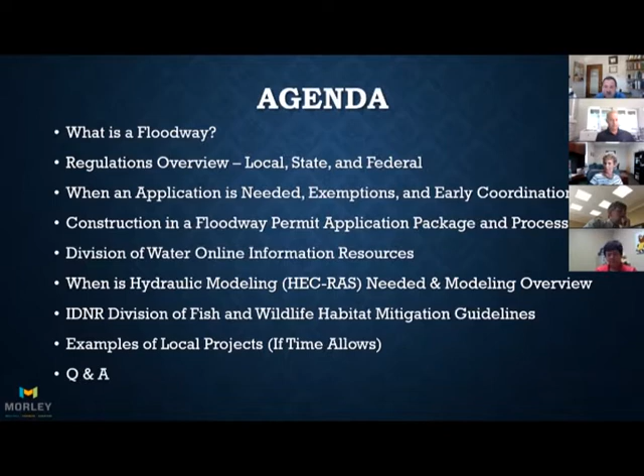This whole issue of floodplains and floodways really stems out of the National Flood Insurance Program. It is a partnership between local, federal, and state levels of government. In the past, our country has seen several significant floods. In our part of the world, we've seen major floods in 1913 on the Ohio and Wabash, 1927 on the Mississippi. Flood of record here in Evansville was 1937 on the Ohio. There was a substantial event in 1961 on Pigeon Creek. There have been several others, and there's been various levels of governmental response to those over the years.

Over time, that eventually led to the National Flood Insurance Act in 1968 and an amendment in 1973. The initial act created the flood insurance program. It made it available and started to create floodplain maps, so people knew if they were in a floodplain, which assisted in the insurance process of trying to figure out your premium, for example. That initial effort, though, was optional - no one made you buy flood insurance, it was up to you. The amendment in '73 added the mandatory purchase requirement, which many people may be familiar with. It essentially tied flood insurance to being mandatory if you had a loan or mortgage, for example, from a federally backed institution. Essentially, the banks needed to have their collateral insured if they were in the floodplain.

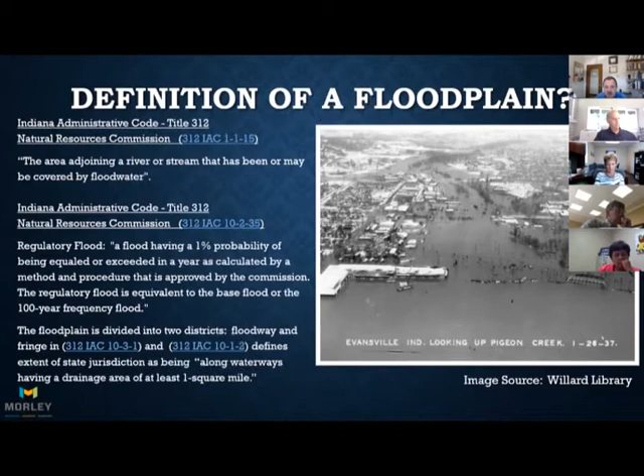Indiana code defines the floodway as, at minimum, the channel, and then the parts of the adjacent floodplain that need to carry water efficiently and move it downstream.

The county ordinance here, and other counties have very similar, if not identical, ordinances, as do cities and towns, with a little bit longer definition. It says it's the channel or stream, creek, ditch, etc.—and the keyword there again being—and portions of the floodplain that are adjacent, to move that peak flow downstream.

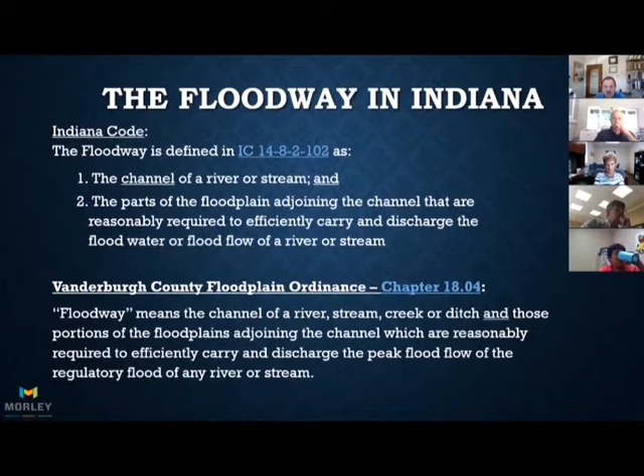So what does that look like? This is a schematic that shows up in essentially every flood insurance study that FEMA publishes. It defines the regulatory floodway. FEMA's online glossary definition of floodway again talks about channel and adjacent lands.

It includes, though, another consideration for cumulative effect, and that's what this exhibit starts to get at. What you're seeing—I'm going to turn on this, can you see the red highlighter? Okay, good. So in this example, the dark heavy line is the existing ground elevation, with the channel here in the middle.

So an assessment was done, and the floodplain was determined to be points A to B, the dashed line horizontally across that cross section. To look at the concept of a floodway, you begin to fill, or the term is encroach, into the overbanks, both left and right, to a point that it causes that same flow rate to increase in elevation by some prescribed surcharge.

When you look at that, you try to do an assessment so that you're taking equally in terms of the capacity—the term used is conveyance—away from both sides as evenly as possible. Sometimes it's disproportionate to begin with, but that's the goal.

That surcharge is defined by some governing authority. In the core NFIP regulations that FEMA prescribes, that surcharge is actually a foot. In Indiana, the State Flood Control Act has modified that so our floodways are based on 1/10 of a foot surcharge. Sometimes you'll see it referred to as 14 hundredths, or less than 15 hundredths.

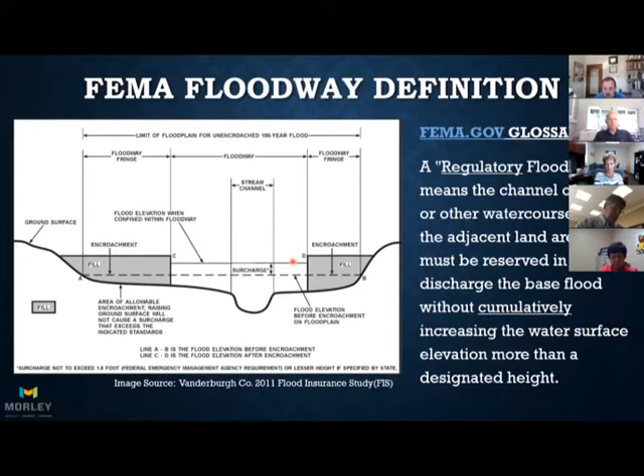This next screen looks at that in maybe a prettier view. In this example, you should think of the factory on the far left and the homes on the right as existing, and then a proposed project may be kicked around that would create an additional factory or an expansion on fill.

As you can see here, originally the floodplain was at this elevation, but by starting to fill in the floodplain, it can increase the elevations, and left unchecked, that can affect people and existing structures that were there before.

This may be drawn as just one single cross section, but think of this in the context of going upstream. Maybe this house is a half a mile upstream, this one a quarter mile upstream. So it's not only about what you do at your site if you're proposing a project or delineating a floodway, you need to see how that assessment affects things upstream, and look at it cumulatively over time as you go forward.

We'll touch back on that after a bit on the application side, looking at how things may change over time if you're doing a detailed assessment.

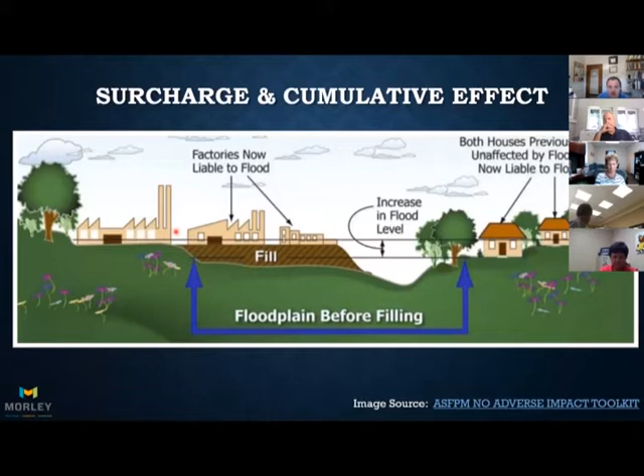So where do you go to find if you're in a floodway? These are some older FEMA FIRM panel maps from Evansville and Vanderburgh County, published in the 80s. This shows Pigeon Creek where it crosses US 41. Notice the county and the city are published on two different maps. This was cumbersome, and they don't do this anymore.

You'll also notice that along the creek, there is no floodway. You just see zone A9 and some elevations, 380 for example, is what's published. Come over to this same point, where 41 crosses the creek, and on the county side you don't see a floodway either. The Pigeon Creek floodway was studied and became official, as I understand it, in the mid-90s.

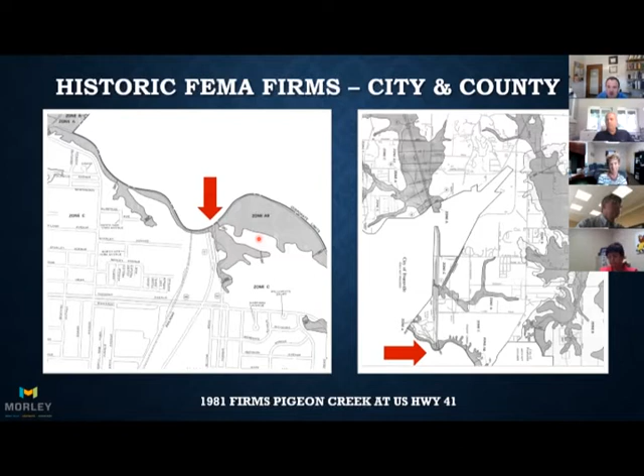That has since been rolled into our current map. So this is the effective FIRM panel for that same area. I'm going to zoom in on that same bridge crossing. Now you can see white angled hatching, which denotes the floodway in conjunction with this cyan line that those cross-hatching lines terminate into.

That is your floodway. The light blue speckled areas are the 100-year floodplain, and the black dots denote what in the past has been termed the 500-year floodplain, actually termed shaded zone X. Beyond that is what FEMA now calls zone X, or on older maps, zone C, commonly thought of as just being, quote, out of the floodplain. It's still in the zone, but that's a change in nomenclature with these newer maps.

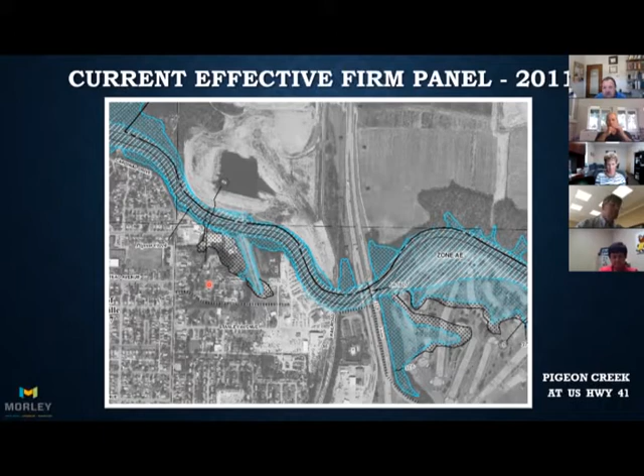With this revision to the maps, the city and county became published in one study, a countywide assessment, which makes looking at things a little easier. They brought in some things that were missing from the prior maps. This is an even better way of looking at it.

FEMA has an online tool, with the web address down here in blue. I believe the intention is that we'll share this presentation with people, so I'll create this as a PDF with these hyperlinks active, so as you see these through the presentation, you'll be able to go back and link through to some of these websites if you so choose in the future.

This is the east side of Evansville, the Harper watershed. It's actually an area that our firm worked on - I drew these floodways for FEMA. That was an involved project. We did a reassessment of the area from essentially the interstate to Wesselman Woods, and from Pigeon Creek down to a little way south of Lloyd, with a series of ditches and streams crisscrossing that area, some years ago.

Prior to that assessment, the area really wasn't mapped as anything more than a 500-year zone, so this was a significant change for that portion of the community.

One thing I'll note about this website is that it can be very slow to load, so just be patient. What you can do here is go into this tool, click that you want to make what's called a FIRMette, which is an excerpt of an official FEMA map, and you can save that as a PDF on letter size, 11 by 17, maybe even legal sized sheets if you need to include that into a report, for example.

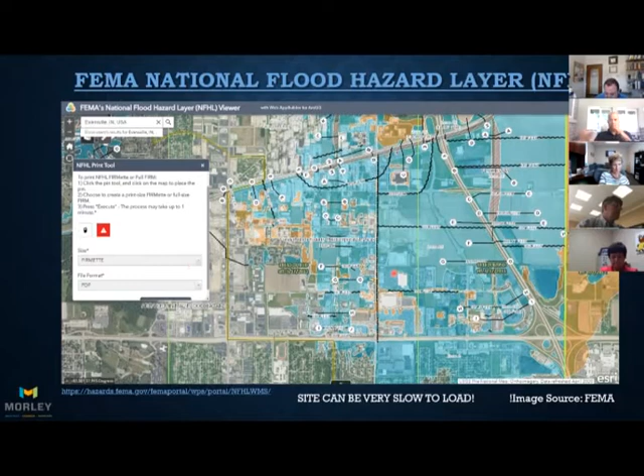When you first go into it through these links, you can zoom down to the county level, type in a street address, however you want to get to where you're curious about. You can click along a stream like I have here, and click on your site of interest.

So this is Lowe's on the east side of Evansville. You can click on that and it will give you an estimate of the base flood elevation. The cross hatching line is telling you that's where the floodway is in proximity to where you clicked.

You can download a report. You can create an official submittal to DNR with this wizard. I'm not going to go through that, but basically you click on it, put in some contact information, and request something more official than just what's off the website.

But in this case, it's showing you the elevations that come out of the official effective FEMA study. And that's when you get your official letter back, it should be what you're seeing here.

Other sources that DNR have, maybe for areas that aren't studied, those are termed A zones typically, or approximate zones, where there is no floodway and no base flood elevations published. It's just shading on the map that says it's a floodplain.

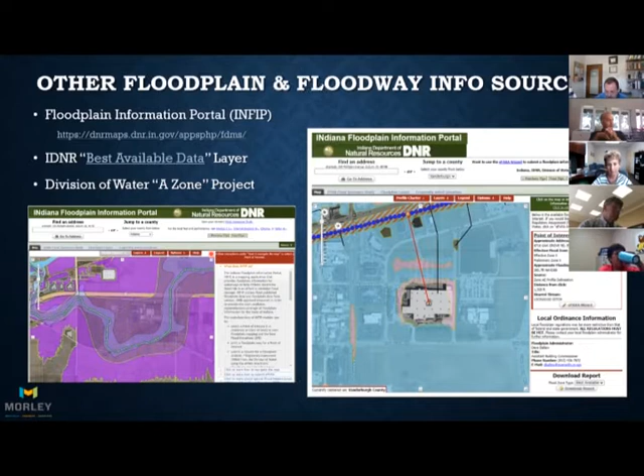This study never went to FEMA. It never got their review or their blessing, so to speak. So it's not recognized on the FEMA maps as being an official study, but it's what the community recognizes as, quote, best available. DNR Division of Water also recognizes it as best available data as well.

So on their website that we looked at a minute ago, the floodway you see may not show up too well on the screen, but the blue shading is the floodplain that was described or delineated, and then the floodway are these black lines you see within there.

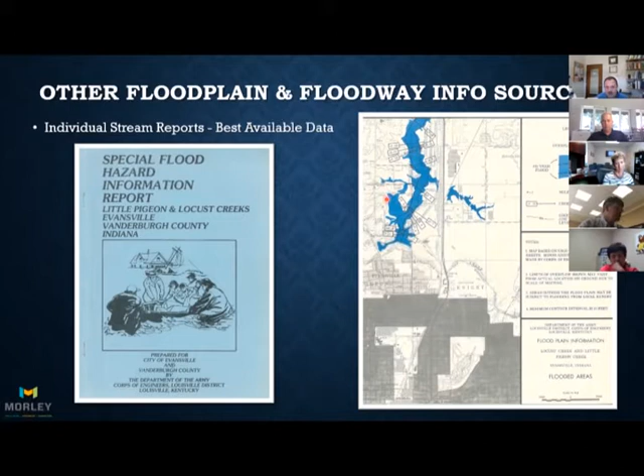So DNR has incorporated that into their online mapping tool, so you don't have to go and chase down this old report. There aren't a whole lot of copies left in circulation to figure out whether you're on a floodway or not near Little Pigeon Creek.

In some cases, if DNR hasn't done an assessment in their A-zone project, if FEMA hasn't looked at it, the Corps and other agencies haven't looked at it, you need to figure out what's going on with your site. It's just an A-zone, so you may need to do your own assessment. That would involve collecting survey data, building a model, doing a map, and sending that to DNR asking for their concurrence.

One thing related to that is if you have a site that is an A-zone and there is no floodway and no elevations, the Division of Water will look at the entire floodplain and treat it as floodway until proven otherwise. If you don't know exactly where that line is, they're going to regulate that entire mapped area until someone draws a line to better define their jurisdiction.

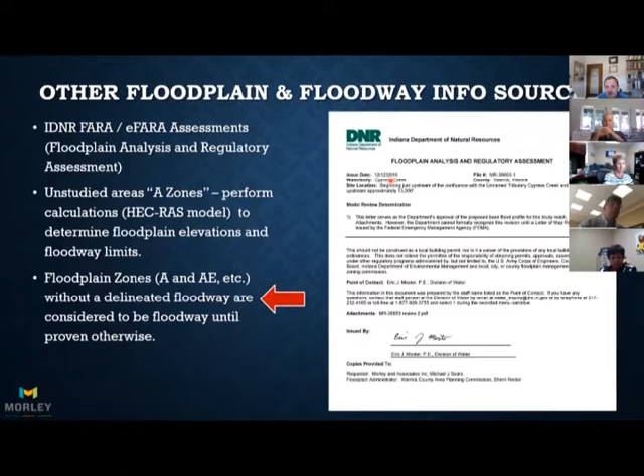So if you've got a site with a wide, expansive floodplain, doing an assessment may be worth your while, as it may make your project less complicated and streamline things. This response letter is how you would get them to agree to that assessment, should you do it.

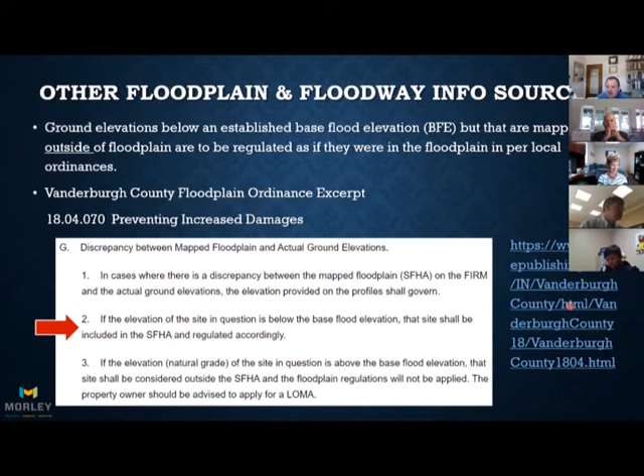That is something that could be dealt with and might affect the timeline for a project you might be looking at. This link here is to get to the county ordinance.

So that was a very brief overview of some of the different places where you can find floodplain and floodway information. So if you want to do a project, construct something, and you figure out you're in the floodway, you need to do an application—what are some of the basic things you might need to keep in mind going forward?

The description needs to be both detailed and brief at the same time. They like to see detailed dimensions and quantities, timetables, areas of impact, and acreages, for example, in your description. If you look at some of the guidance on their website, they'll give you templates you can borrow from—say if you're doing a bridge, they've got bridge templates where you just fill in your numbers unique to your project, and that'll get you going in the right direction.

Beyond that, you'll need to do a public notice to neighbors. I'll come back to that in a few minutes.

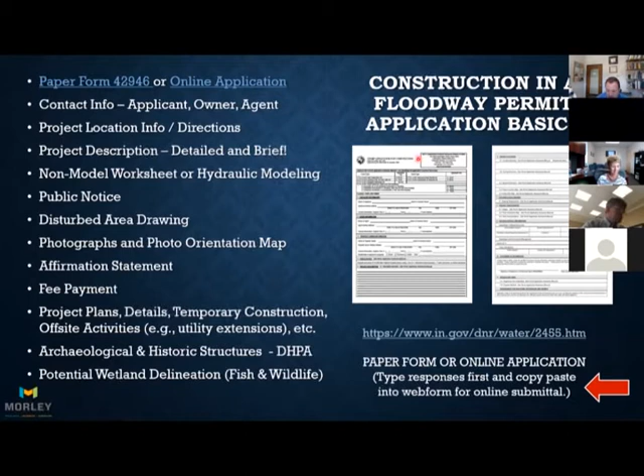The affirmation statement—I'm going to go to the next screen, that'll be a little more legible. The affirmation statement is essentially where the client would sign saying, yeah, this is what we're really going to do, it's an accurate representation of our project. And that's required.

With a paper form, you do it here. You can do a digital submittal, and then you actually get a form back that you sign and resubmit as a follow-up submittal. You have to pay a fee.

Generally, a construction-in-a-floodway permit is $200. If you do it digitally, there's about a $15 electronic surcharge fee on top of that. I recommend doing it online—it's a lot faster rather than sending it in on paper.

Then it goes into a queue in Indianapolis for someone to type into their system. You can type it in on your own. When they first went to the digital option, they were estimating it would save about two weeks. I don't know if that's still the case, but in the past, that's what DNR was telling us.

What they've created is a joint application between the Division of Water for floodways and IDEM for the State 401 water quality certification, which in particular includes isolated wetlands. When you click on that, they've got some guidance here on how to go through this process. In a nutshell, they've taken components of the DNR application and components of the IDEM application and put them together all in one.

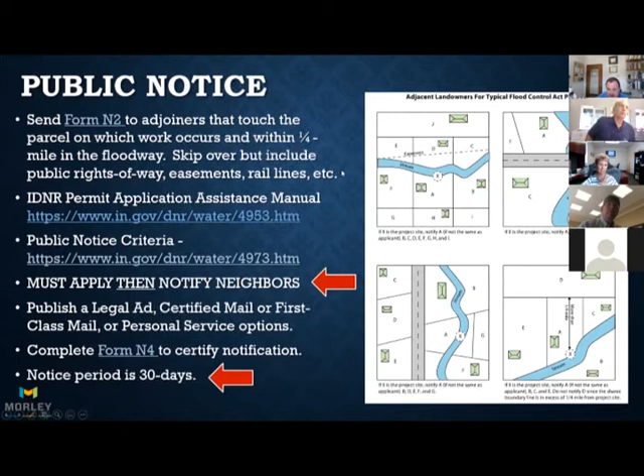If you meet that criteria, then you don't have to do a permit application. If you're not 100% confident that your project meets that criteria, it probably would be worthwhile to reach out to DNR and say, hey, this is what we're planning to do - we want to confirm that, yeah, we can work under the general license.

It's always better to have something than nothing if there's a disagreement in the end on how they interpret your project. Especially since things happen on projects—changes happen, field changes occur. You need to keep this in mind with the terms of what's allowed in the general license if you want to take that route. Things like that do crop up.

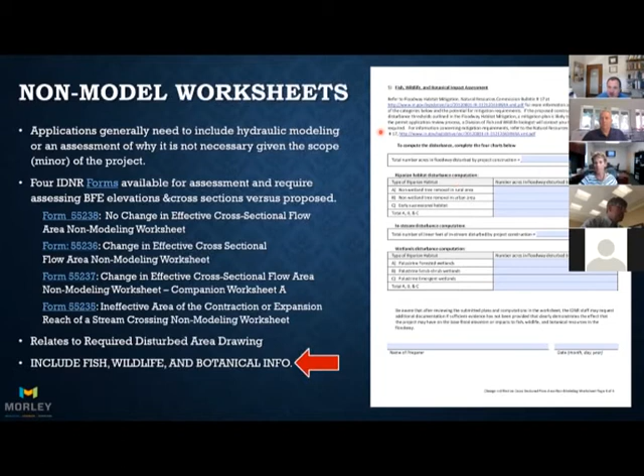This form is required as part of the non-model assessment. I'll come back to mitigation in a second. If you don't meet the criteria set forth in those forms, you have to do a model.

So we typically use HEC-RAS software, developed by the U.S. Army Corps of Engineers. You essentially define a series of cross-sections and a flow rate, and run that through those cross-sections. You define data about bridges, and aspects of the cross-sections in terms of maybe where water's flowing and where it's not. HEC-RAS has gotten a lot more sophisticated in recent years.

It was a replacement for an earlier program called HEC-2, which was originally developed on mainframes. In the early days of the software, the work was actually done on punch cards. That's going back a while, but that was an improvement over what it replaced, which was slide rules and big sheets of paper. So HEC-RAS is a very user-friendly program.

In a way that's good, in a way it's bad, because it'll run with really bad data. So part of doing an assessment is setting up your model, having some underlying assumptions about how you think the flow is going to move down your channel, setting your model up accordingly, running it, and looking at the results to see if they match the assumptions you had in mind. Sometimes you've got to go back and iterate, trying things back and forth. It's not always straightforward.

Key component of that is your flow rate. You have to have a 100-year flow rate that Division of Water is on board with. If there's a value published in a FEMA FIS for the insurance study, that's what you need to use. Otherwise, you need to come up with one of your own.

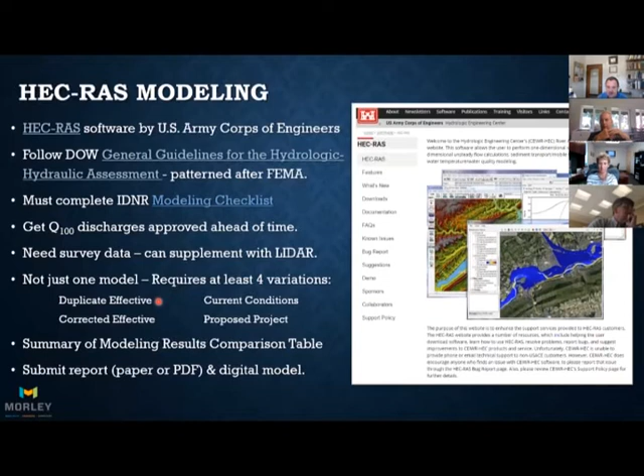Historically, DNR required applications on paper. A couple I've done recently, I've submitted just PDFs, and so far they've accepted those. They're moving to a more digital world, and I'm all in favor of that too, because it's just so much more streamlined. So what that would look like in terms of that comparison is this.

One thing I didn't say is that when you do these additional variations of your model from the base, you're going to add extra cross sections. You may have an area of interest where your fill pad is going, or where your culvert is going, or whatever your project consists of. You need to define cross sections of those areas of interest, and you can capture that as a computational point in your assessment. So you have to go back and try to recreate what should have been in the base model there, as best you can, to make those assessments.

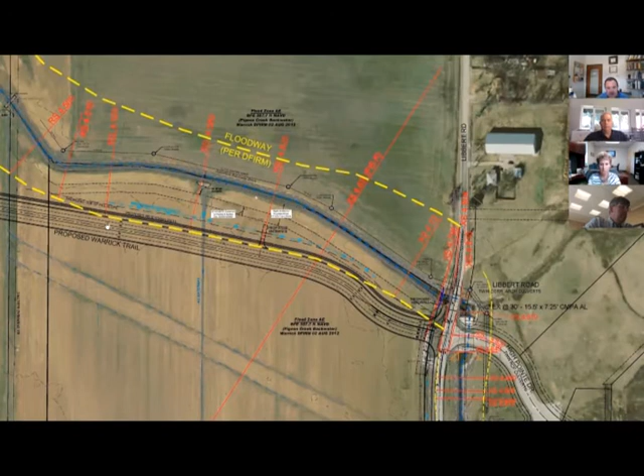This yellow dashed line was a subsequent study - kind of a combination of work that our firm did and also Bernardin Lochmueller over the years. Each of these cross sections got added to capture different points of interest for the road project. And then these larger cross sections are what was in the FEMA study. So that helps the reviewer get a feel for where these cross sections are, so they can review what you've submitted.

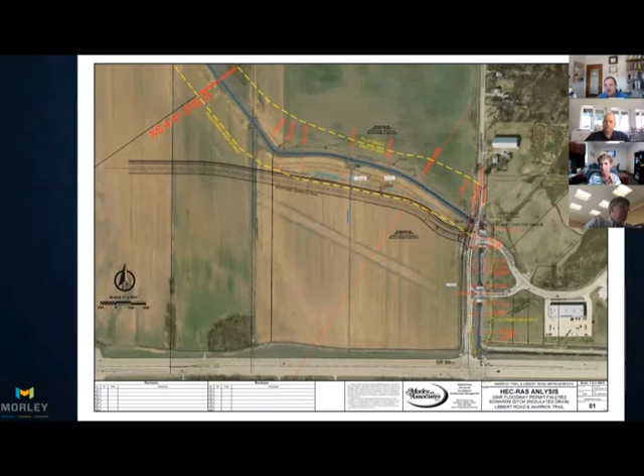Another component of an application for the permit involves considerations for historical structures and archaeological sites. When you apply for a permit, it's not just to the Division of Water - I mentioned Fish and Wildlife earlier, and I'll mention Historic Preservation and Archaeology, or SHPO, State Historic Preservation Office, as it's referred to. Those other agencies look at applications as well. If you have archaeological sites or Native American sites, those reports and a lot of that data is confidential - you have to be a registered archaeologist to get that. So we've had to bring in some archaeologists on projects in the past to work through that with them.

For things that aren't as sensitive in nature, in the past the state had published their county survey books. Those have now gone digital, so what you're seeing on the screen are the dots and sites that were in those maps. It's a lot easier for them to update rather than republishing printed books each time. You can click on these sites and get information about each of them, and the National Register sites show up here as well.

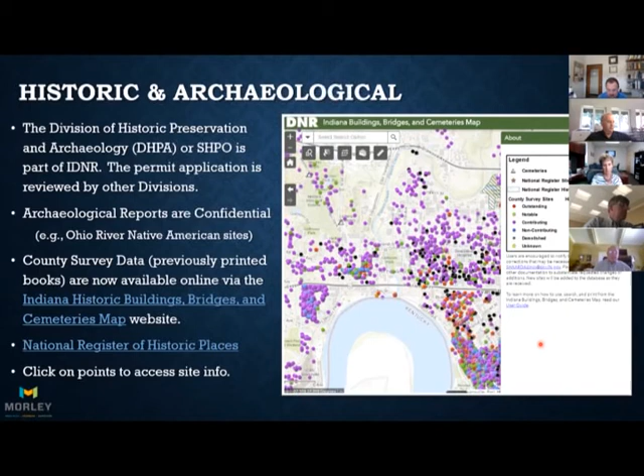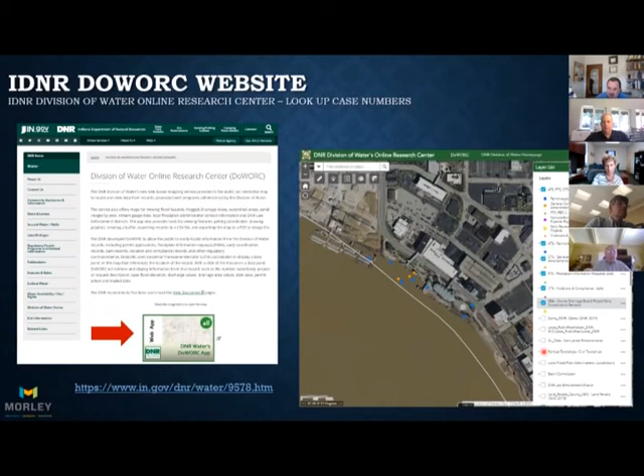One of them is the Online Research Center. It's a link available here. It will give you a map of previously established case numbers, whether it's permits, violations, or just inquiries. One thing about this is you do have to go into the legend and turn on these blue check boxes. When you first come into it, everything is off. Then you can click on those dots and get some information about that site.

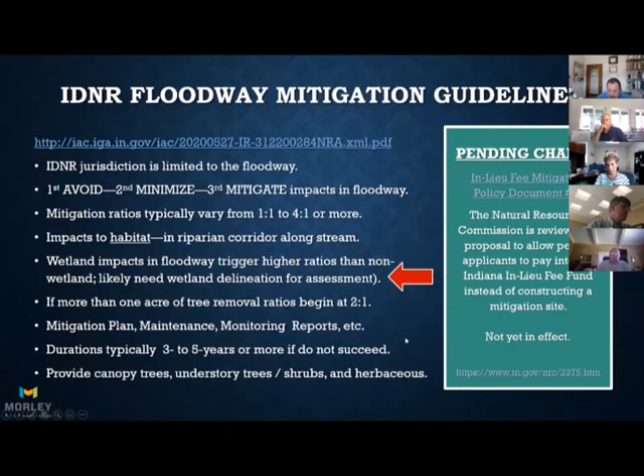This was an example of mitigation we did on a project here for the city recently. There was a slide out along the greenway that was near the levee. It was a project that involved working with the levee authority, Parks Department, Corps of Engineers, and DNR. So the slide area was repaired, and then there were some tree plantings done near the Heidelbach canoe launch to offset the trees that were lost in making that repair.

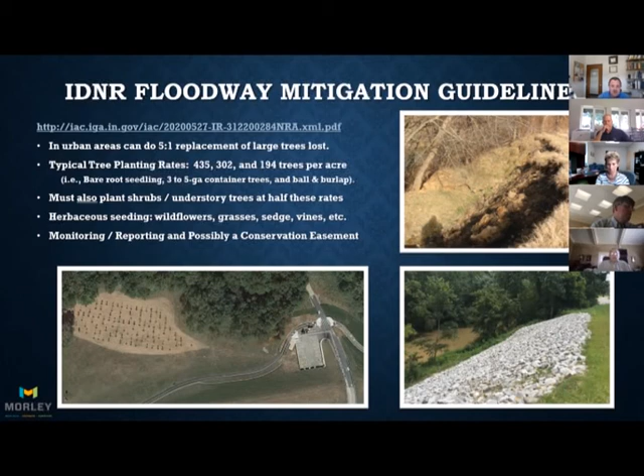In this case, I think it was a 5:1 ratio. It was in an urban area. You can look at the number of large trees you take out and mitigate at 5:1 as opposed to just acreages. The guidelines have different thresholds depending on whether you do plantings with bare root seedlings, container trees, or larger ball and burlap species.

A couple of real quick examples. One thing too—what can trigger when you need an application for a floodway permit? It's basically anything in the floodway.

But so many other activities that occur—whether it's construction, utilities, dredging, mining, storing material, developments—anything that would, this last one is sort of a catch-all, change the direction, height, or velocity of water. One key takeaway though is that residential is not allowed in the floodway in Indiana.

I worked on a pedestrian bridge at Friedman Park—a small footbridge to connect the golf course with the park. For this one we had to do an assessment to come up with the flow rate. That area had also been impacted by mining, some of the pits that are out there, so that was part of that process.

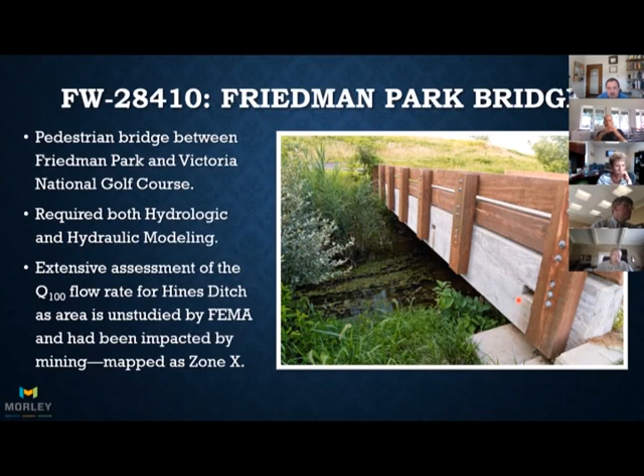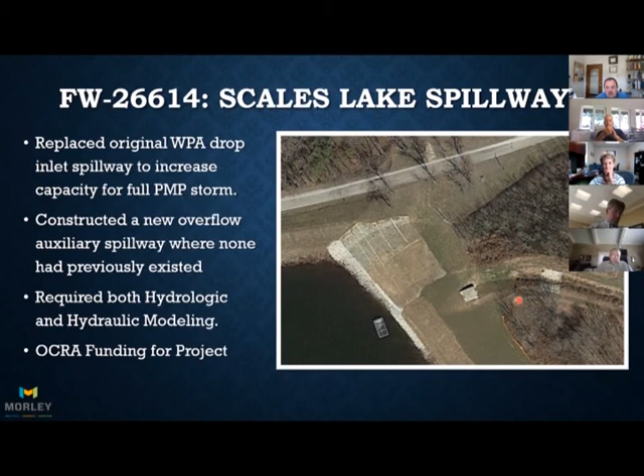I worked on the Scales Lake spillway replacement in Boonville. We do modeling for the flow rate to see how it would move through the new spillway. It's a much larger spillway now than what had been there previously.